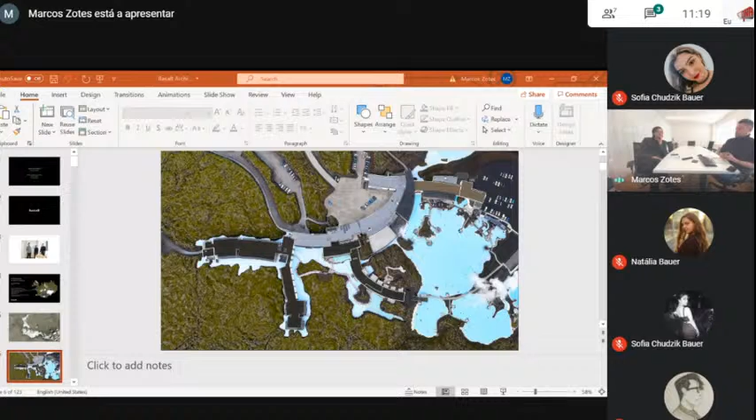Okay, so the Blue Lagoon retreat consists of 2 parts really. It's a spa with restaurants and changing rooms, and the hotel to the left with 2 wings connected to the spa. The whole project is connected to the previous phases of the Blue Lagoon. What's interesting is that when the Blue Lagoon extends its facilities, it's not only to receive more people, but also to add an experiential part to being there. This latest phase was a more luxurious extension to what was already there, so it offers something really for everyone.

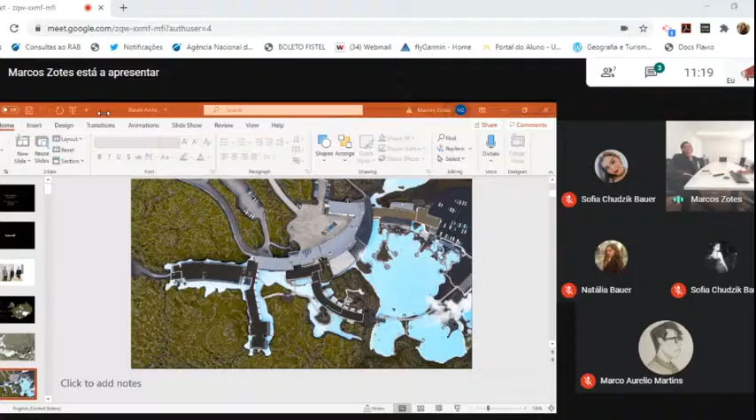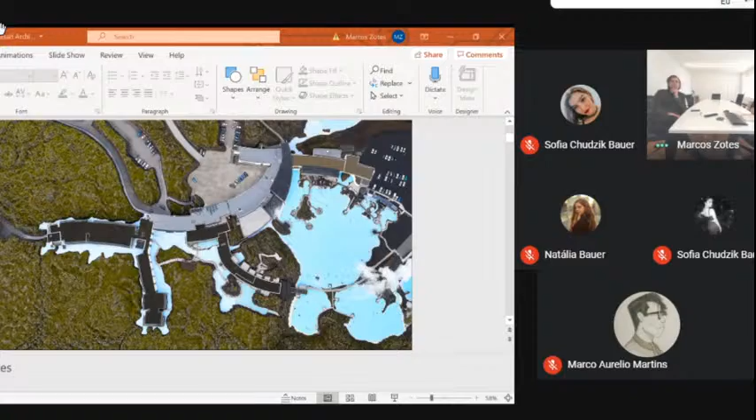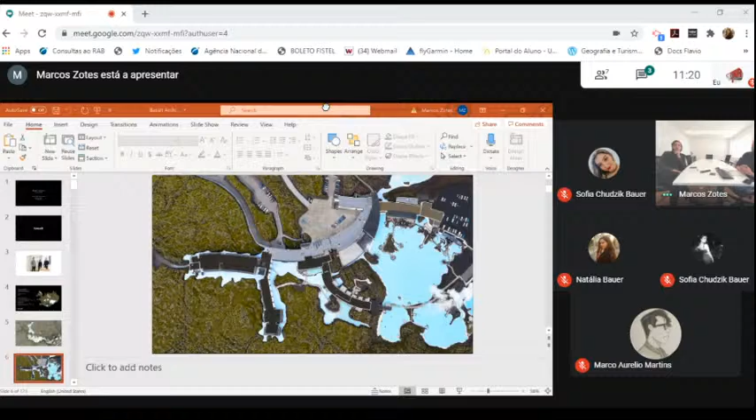What's very interesting about this project is how we got to work by setting it into the land. As we started off saying, it's a volcanic island, and this lava field that is the setting for the Blue Lagoon is really a very dramatic lava field. It's quite rough lava, and it's an intimidating site to work into. We tried to do it with a lot of respect, touching as little as possible what was there before, making our project so that when you come there, you can really appreciate what was there before.

Use architecture as a platform to enjoy what is already in place. Here on the right, you can see the spa that lowers into the ground and connects to the existing lagoon. On the left, the two hotel wings are connected together in the center.

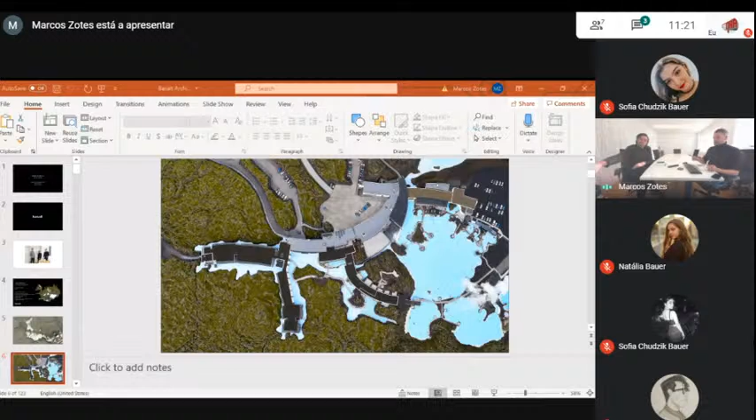What was so fantastic about this project is that we really got to incorporate what we found when the earthwork started. If the constructor found something of interest when they opened the ground, they would call us and we would get to evaluate whether we should include this in the design or not. So it was a very interactive way of working, and we essentially had to redraw the project two times, or more in some places.

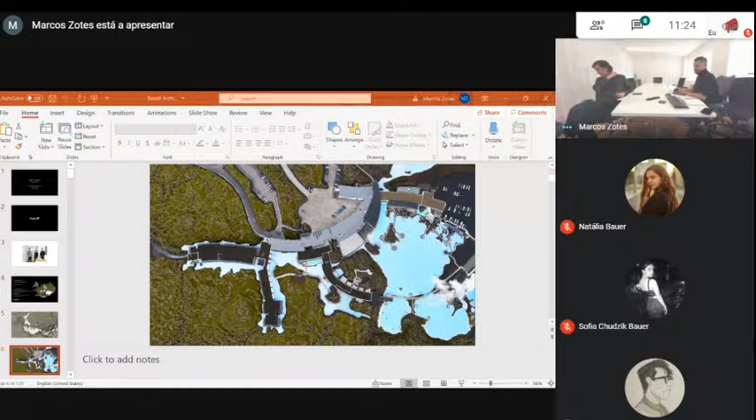Can you see my screen? Marco, can you see my screen, it's not showing? No, not yet, it's not. Can you see it now? Okay, so just tell me when you need me to pass the slide. We can start whenever you want to. All right, can you hear us? Okay, I think we're ready again, sorry for this technological mess, but we'll continue.

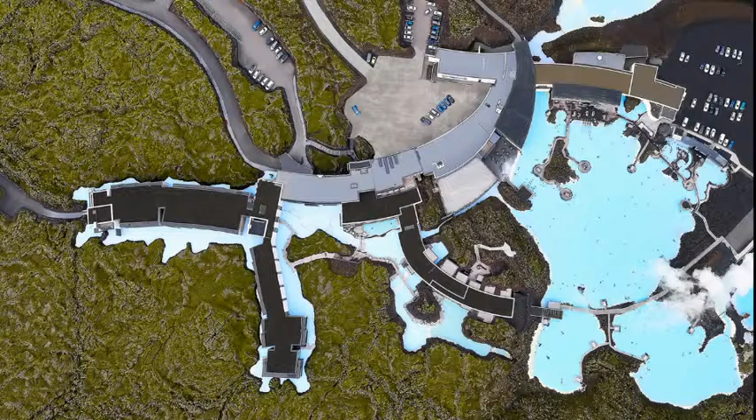If we can please go down to slide number 6, that's it. Okay, so we'll take it a little bit from the top, but not quite. This is the Blue Lagoon again. The middle part that you see extending in a slight curve down is the spa part of the building. The part to the left is the hotel with two wings connected together in the middle, and then again connected to the existing, previously existing spaces. We go one slide down, next slide.

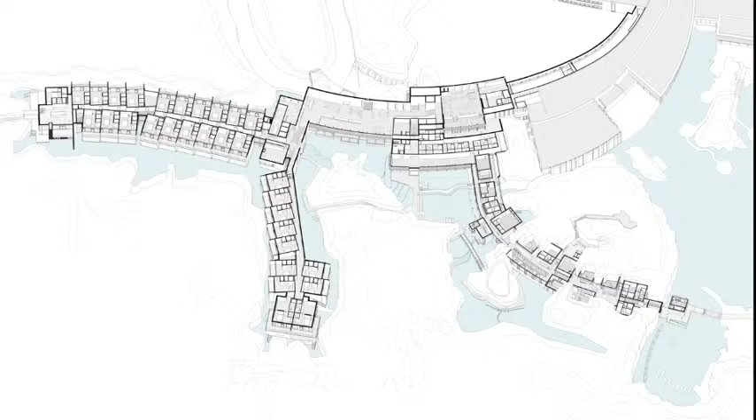It's important to say when we're working on a project like this, we have to keep in mind the 2 most important things about the site, which is the lava and the moss, and the water. So the lava and the moss become part of the building, become part of your experience of being in the place.

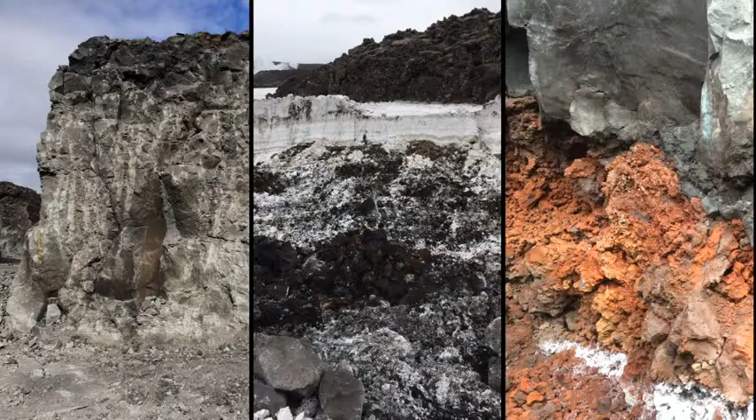So this is from when we were... yeah, so you can see once we had laid out the program, we drew the building 1-to-1, how we thought it should be.

Then when the groundwork started, the top layer of lava was removed and reserved for use later, because it has a very delicate moss growth on top that we wanted to preserve to cover the roofs later on. Once they opened the ground, there were many surprises, and we had the privilege of working with a client who understands the value of the site. So if there was something interesting we felt we should incorporate into the building, they would stop the groundwork, and we would see if we had to reconfigure the drawings, which we had to do a few times to maximize the experience of the land when you're in the building.

This is part of what we found in the ground. To the left, you see a kind of very heavy basalt rock. On top of it is a crumbling layer of floating lava. In the middle, you see where we dug into where a lagoon was. You can see the top white layer, a thick layer of silica that has gathered over the years at the bottom of the lagoon. And to the right, you can see a red crumbling pumice stone that sits underneath all the heavy basalt rock. I remember the face of the geologist when he saw this, and he realized that everything floated on top of a very loose layer. But he got over it a little bit later.

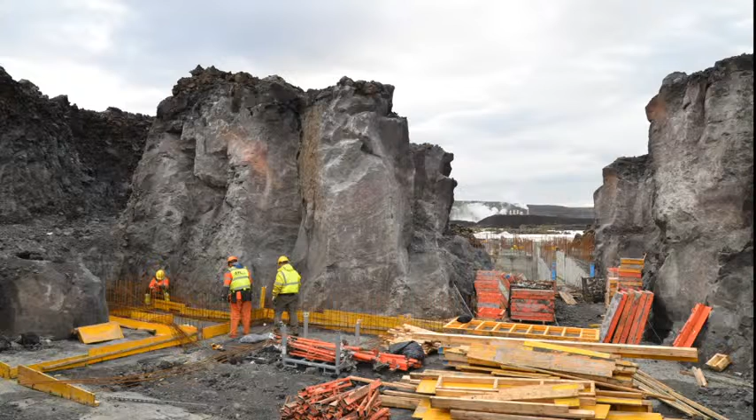This is a picture from the groundwork. What you see here is bare lava walls from the excavation, but these would become the interior walls of the building, which is part of what I'm talking about, that you always have this presence of the lava, the presence of the moss, and the presence of the water. So it's essentially like we're digging a hole and then placing a roof on top of it. It's a kind of cave building.

So then we had to build the building on top of this, and we used concrete in this case, which of course Brazilians know very well, and I think you should cherish the fact that you don't have to insulate your concrete in some places in Brazil, so you can do amazing explorations with concrete. Here we're not so lucky, but what was a little special in this project is that we wanted a building that was part of its environment.

So we said, okay, we have lava walls inside, and if it's raining, then it also rains inside. We had channels in the floor because the lava is porous, so it rains outside, and then the walls inside become wet. So essentially, we designed a leaking building in a sense. You experience the weather inside when it's raining and when it's snowing. And then you can just see how it starts to become part of the space.